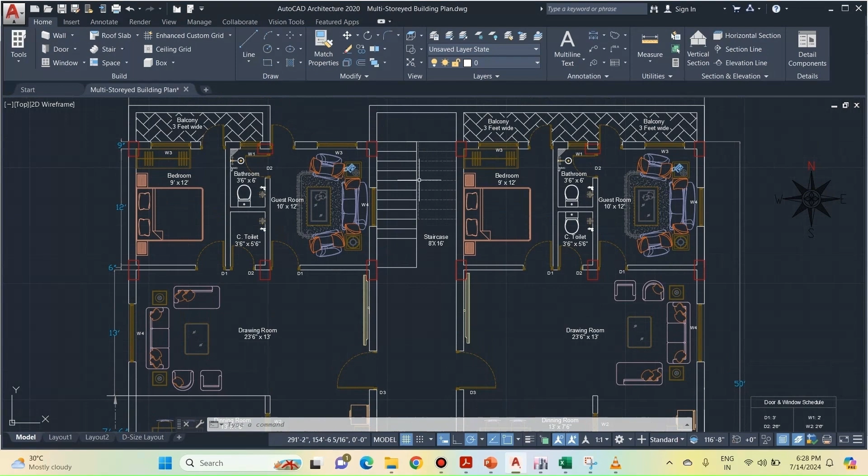In this lecture, we will be modeling a staircase in ETABS and we'll also be calculating the staircase loads and applying them in our ETABS model. So first of all, as you can see from the architectural plan, in this area we'll be modeling our staircase between these four columns. So in ETABS, if you see, in this area we are going to model our staircase. That is between grids C and D and grids 4 and 5.

First of all, in the plan view, we will be modeling the staircase connecting story 1 and story 2. So go to story 1 by clicking on this arrow, that is at elevation z equal to 1.5 meters. First of all, we need to create reference points in order to model the landing slabs.

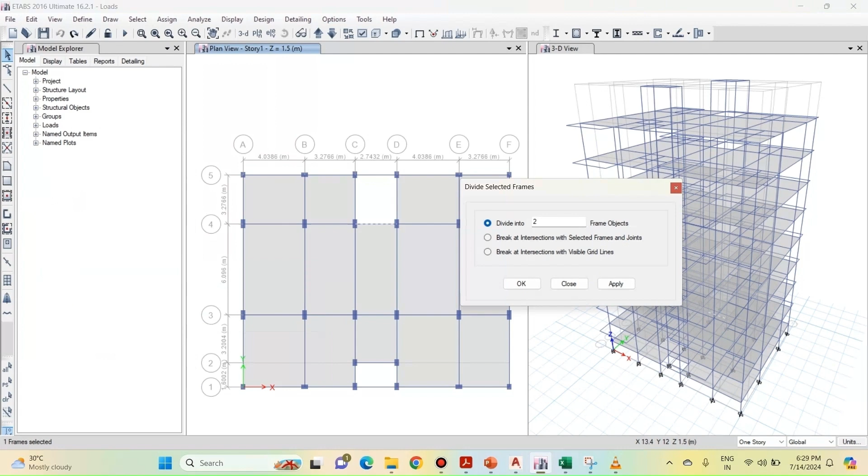In order to create the reference points, select this beam, go to the edit menu, click on edit frames and click on the divide frames option. We are going to divide this beam into two equal parts. Click on apply and click on OK. So now you can see that ETABS has divided this beam into two equal parts.

Now select these two joints, go to the edit menu, click on replicate. We are going to replicate these 2 points in the y direction by 1 meter, since the width of our landing slab is 1 meter. So type 1 here, click on apply and click on OK. So now you can see that we have our reference points so that we can model our landing slab at the level of story 1.

So we will go to this draw floor plan button in order to model our landing slab. The thickness of the slab will be 150 mm, which is similar to a typical slab. So select slab 150 from the list and click on these 4 corners of the slab in order to model our slab. So here you can see that we have modeled our landing slab at story 1.

We have divided this beam into two equal parts; however, in reality this beam will be a continuous beam. So select these two beams and let's rejoin this beam again. So go to the edit menu, click on edit frames and click on the join frames option. So now you can see that this beam is again rejoined.

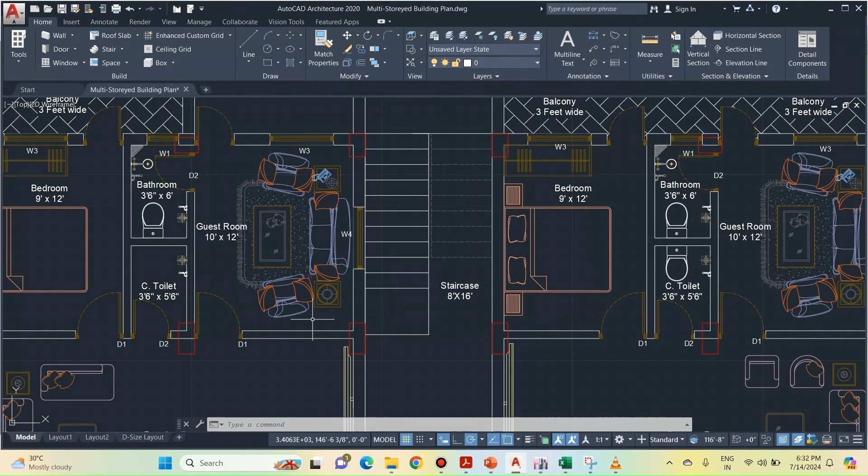Now we also need to model the mid landing slab at the mid landing level. So what will be the elevation of this mid landing slab? As you know, the floor to floor height is 2.75 meters. So the elevation of this mid landing slab will be half of this 2.75 meters.

So if you see here, from base to story 1, the height is 1.5 meters and we are starting our staircase from story 1. So we will have the mid landing slab between story 1 and 2, somewhere around this level, which will be half of 2.75 meters. So the elevation of our reference plane will be 1.5 meters plus 2.75 divided by 2, which will be 2.875 meters. So in order to create the mid landing slab, we need to add the reference plane in ETABS. So let's add the reference plane.

So go to the edit menu and click on the edit stories and grid system option. Click on modify show grid system and select reference planes. Click on add. So we are going to add the reference plane at 2.875 meters. Click on OK and again click on OK. Click on refresh view and again click on OK. So now if you see, between story 1 and 2 we have a reference plane at 2.875 meters.

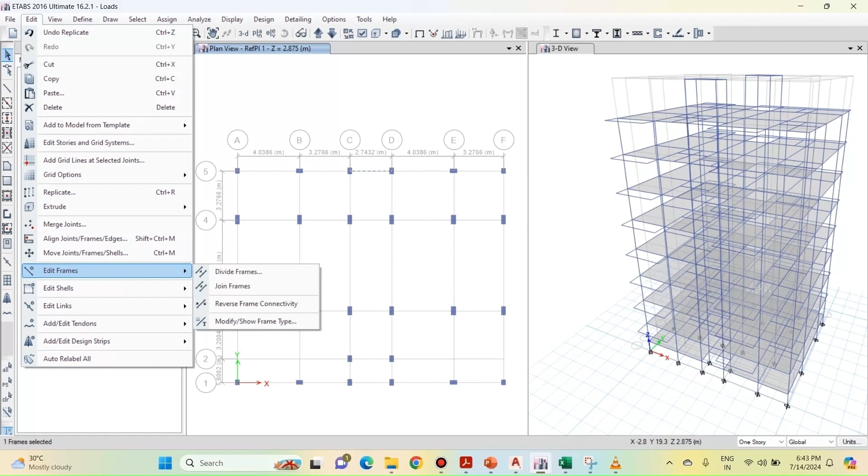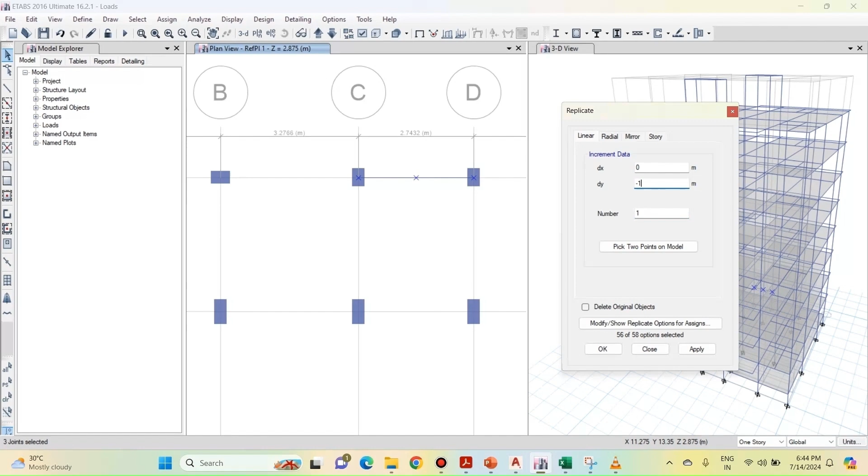Now let's divide this beam again in order to create the reference points. So select this beam, go to edit, select edit frames and click on the divide frames option, click on apply and click on OK. Now select these three joints. This time we will be replicating these three joints in the minus y direction. So type -1 here in the dy direction. Click on apply and click on OK.

Now let's draw the mid landing slab. So select the draw floor plan button. The property will be slab 150, and click on these four corners to draw the mid landing slab. Rejoin these two beams again to have a single beam.

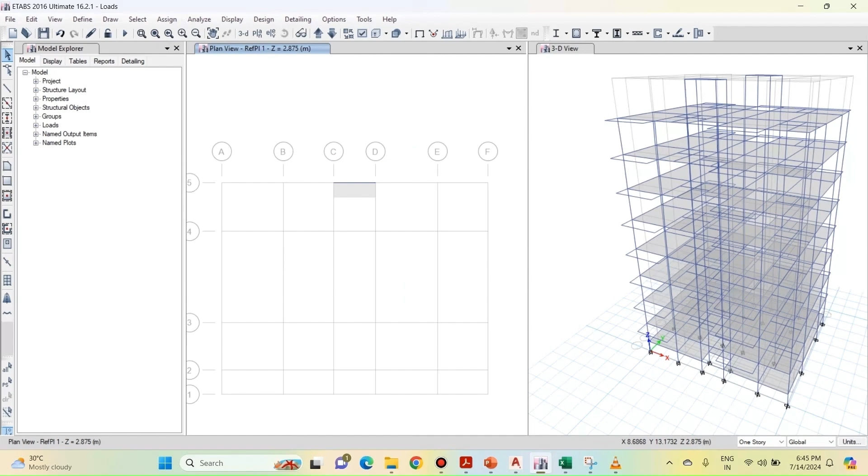Now we'll also need to create a landing slab at the level of story 2. So go to story 2. We will follow the similar procedure that we did for creating the landing slab at story 1.

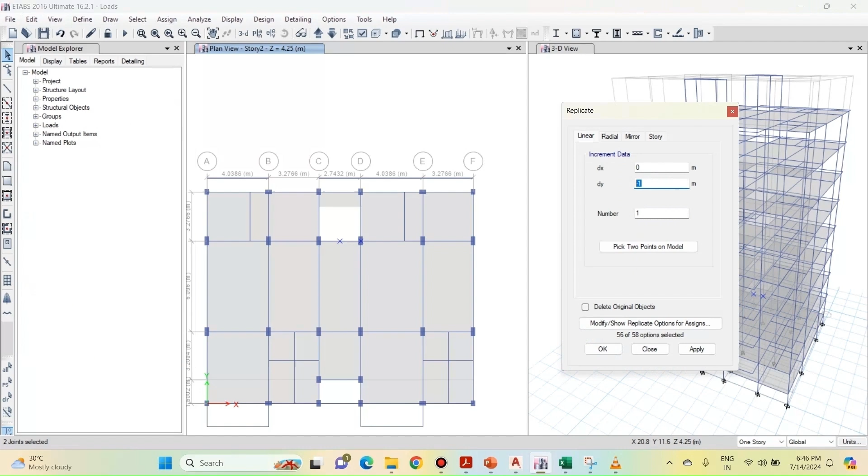Select this beam, go to edit menu, click on edit frames and divide this beam into two equal parts. Now select these 2 points, go to edit, then click on replicate and replicate these two joints at a distance of 1 meter. Click on apply and click on OK.

Now let's model the landing slab at the level of story 2. So click on draw floor plan button and click on the 4 joints to model the landing slab.

Now again rejoin this beam, since in reality this beam will be a single beam. So we have created the landing slabs and the mid landing slabs.

Now we will connect these all slabs with the help of inclined slabs. So go to story 1, click on this draw floor plan button, click on these points.

Now the other 2 points of the inclined slab will be at the mid landing level. So with this tool active, click on this up arrow to move upwards at the level of reference plane and then click on these 2 points.

The starting point will be again at the level of story 1. So again with this tool active, move downwards and click on this point to complete the inclined slab.

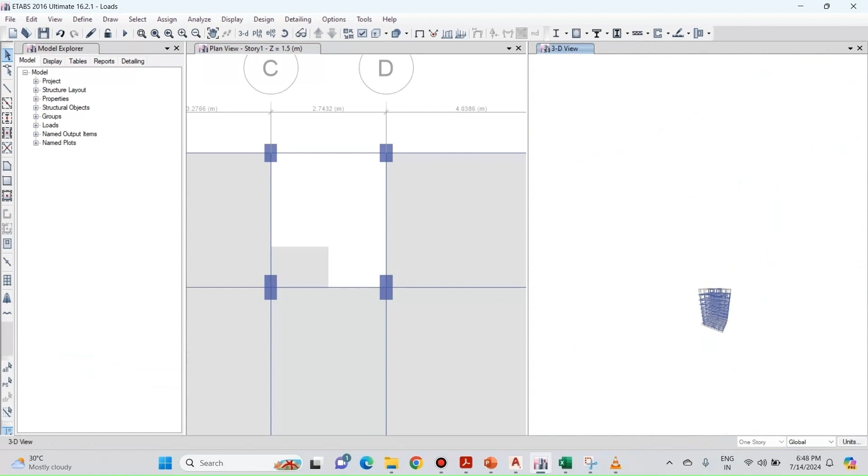Here you can see in 3D that an inclined slab is modeled.

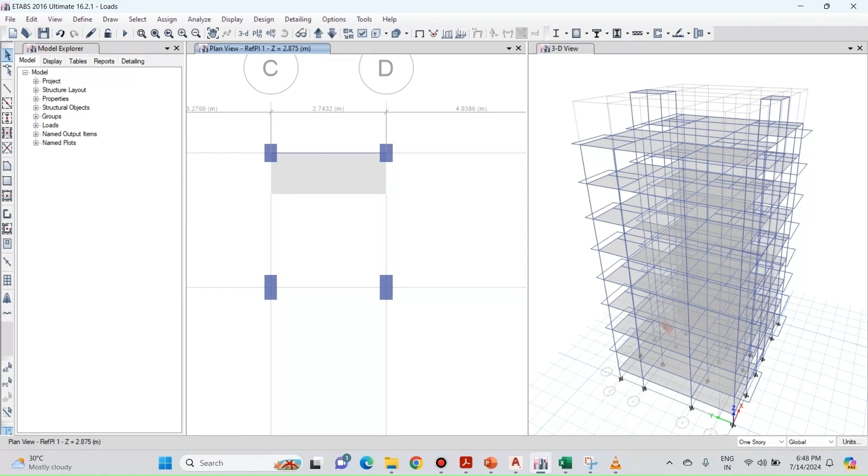We will follow a similar procedure to model the inclined slab between reference plane and story 2. So go to the reference plane level, click on draw floor plan button, click on this point, then click on this point,

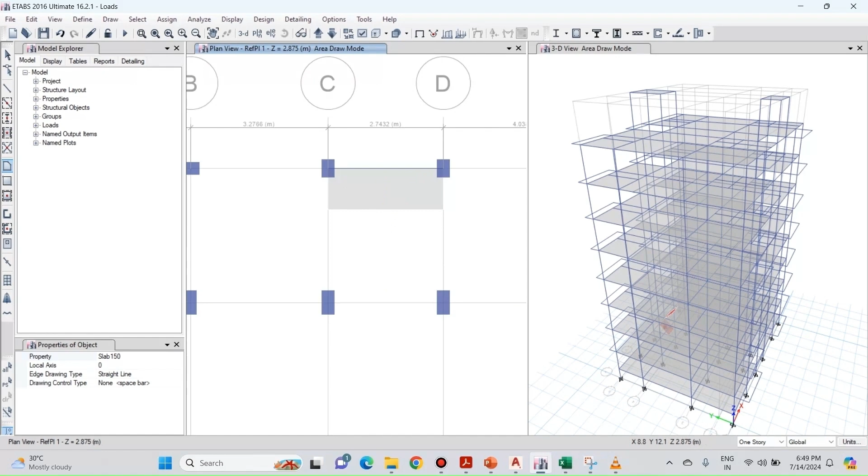then move up at the level of story 2, then click on this point, and again move downwards to complete the inclined slab. So here you can see in 3D the inclined slab has been modeled.

Now let's model the staircase between story 2 and story 3. In order to model the staircase between story 2 and 3, first of all, we need to add a reference plane between story 2 and story 3 in order to model our mid-landing slab.

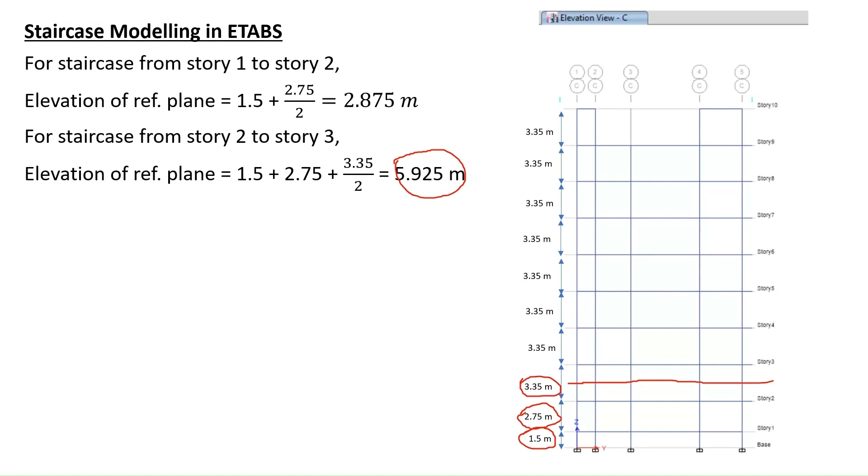And the elevation of that reference plane will be 1.5 meters plus 2.75 meters plus half of 3.35 meters. So that will be equal to 5.925 meters. So we will add a reference plane at an elevation of 5.925 meters.

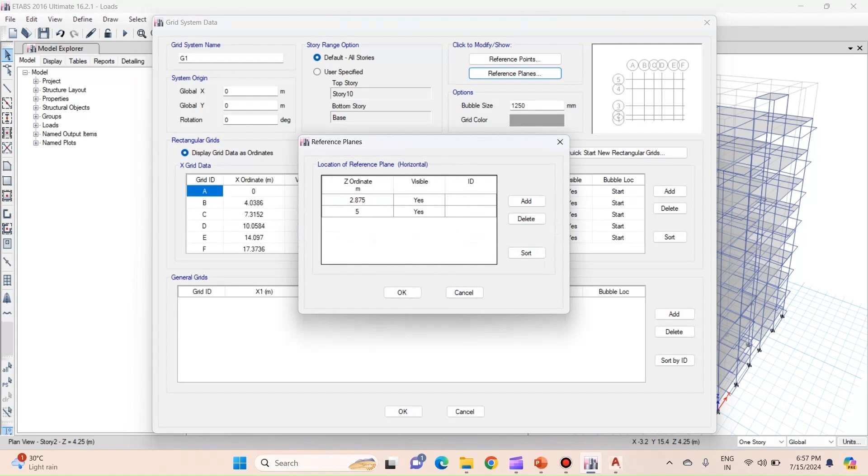So open ETABS, go to edit menu, select edit stories and grid system option, click on modify show grid system option, click on reference planes, click on add and enter the value as 5.925 meters. Click on OK, click on refresh view and again click on OK.

So now you can see that we have a reference plane between story 2 and story 3. Now again we need to have a landing slab at story 2, then we need to have a mid landing slab at reference plane 2, and then again we need to have a landing slab at story 3.

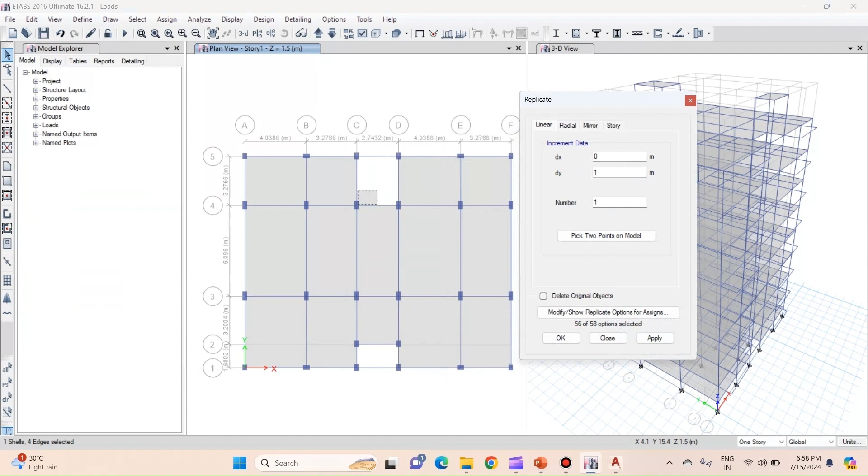So now this time what we will do is we'll replicate the landing slab from story 1 to story 2. So select this landing slab, go to edit menu, go to replicate, and in the story option we'll replicate this to story 2. Select story 2, click on apply and click on OK.

So now you can see that you have a landing slab at story 2. Now the landing slab that we created at story 2 we'll replicate it to story 3.

So select this landing slab at story 2, again go to edit menu, select replicate, and in the story option we'll replicate it to story 3. Click on apply and click on OK.

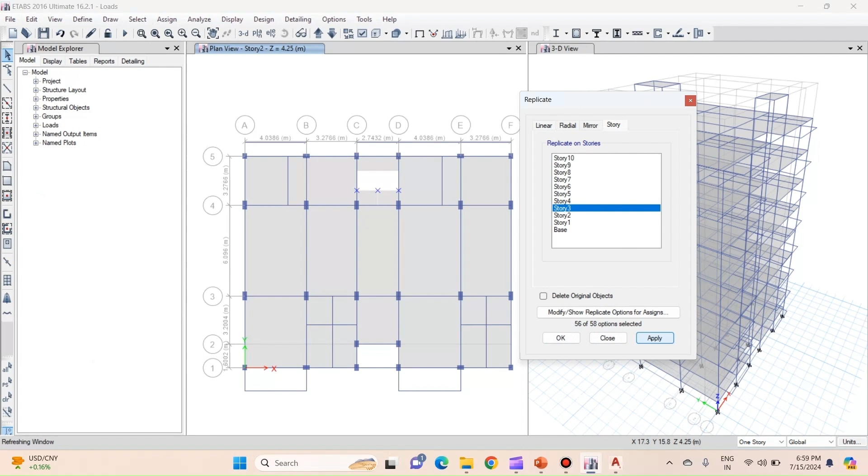Along with that, we also need to replicate these joints. So select all these 3 joints, again go to edit menu, replicate, and replicate it to story 3. We also need to replicate the 3 joints that we created at level of story 1 to story 2.

Now we'll create the mid landing slab at story 2 at reference plane 2. First we need to add a beam, so click on the draw beam option. The beam will be B2, 300 by 450. Draw a beam between grid C and D.

Then divide this beam into 2 equal parts. Copy these 3 joints and replicate them at a distance of -1 in the y direction.

Now first we need to create an inclined slab between story 2 and reference plane 2. So select this draw floor plan option. The property will be slab 150. Click on this joint, then click on this joint. Then, keeping this tool active, go to the level of reference plane 2.

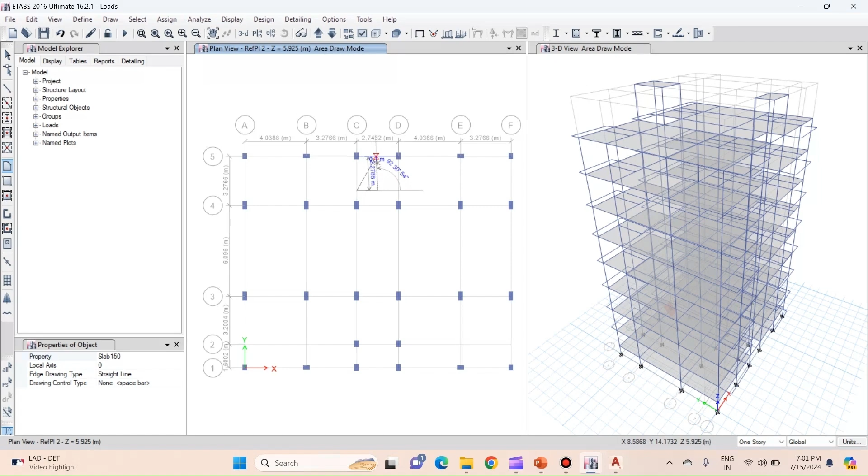Click on this joint, click on this joint, and again go downwards and click back on this starting point. So you can see that the inclined slab has been modeled.

We also need to create the mid landing slab at reference plane 2. So click on this draw floor plan option and click on the 4 corners.

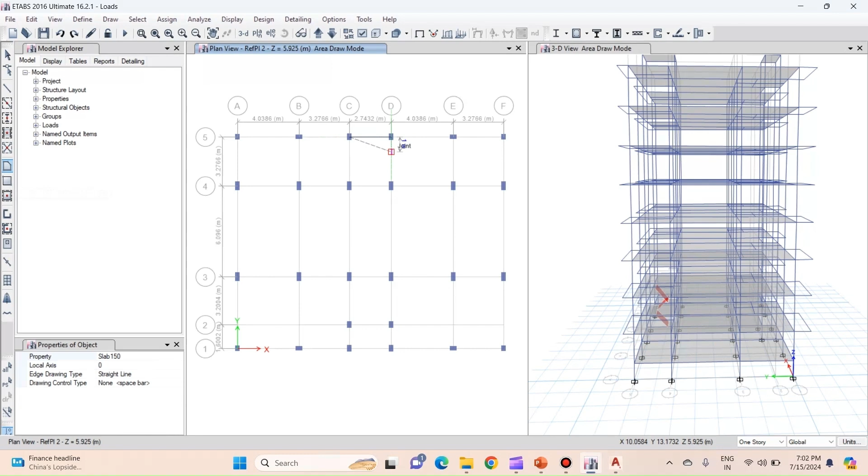Oops. So click on this draw floor plan option again and click on the four corners to draw the mid landing slab.

Now we need to also create an inclined slab connecting reference plane 2 and story 3. So go to the level of reference plane 2, and again select the draw floor plan option.

Click on this point, click on this point. Then, keeping this tool active, go upwards to the level of story 3. Click on this joint, click on this joint. Then again go downwards and click on this starting point to model our inclined slab.

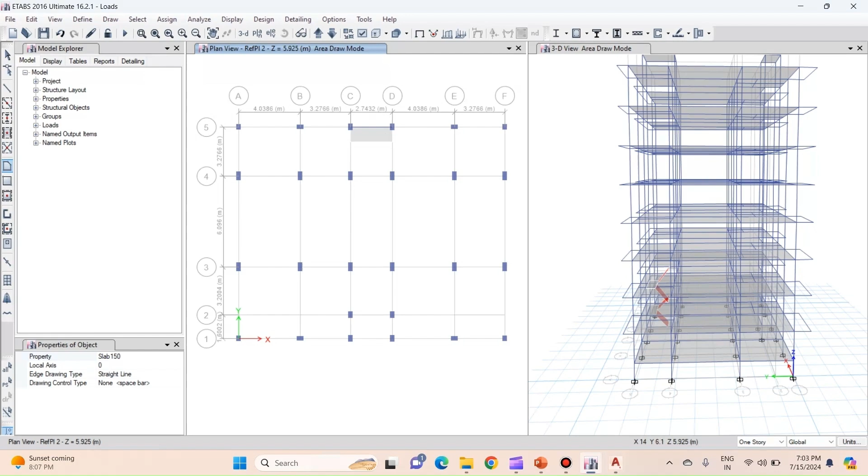So now you can see in 3D that our inclined slabs have been modeled between story 2 and story 3.

Now first we will replicate all our landing slabs and mid landing slabs from story 2 and story 3 to the upper stories. So first go to the level of story 2. This will be your landing slab, so select this slab, then go upwards.

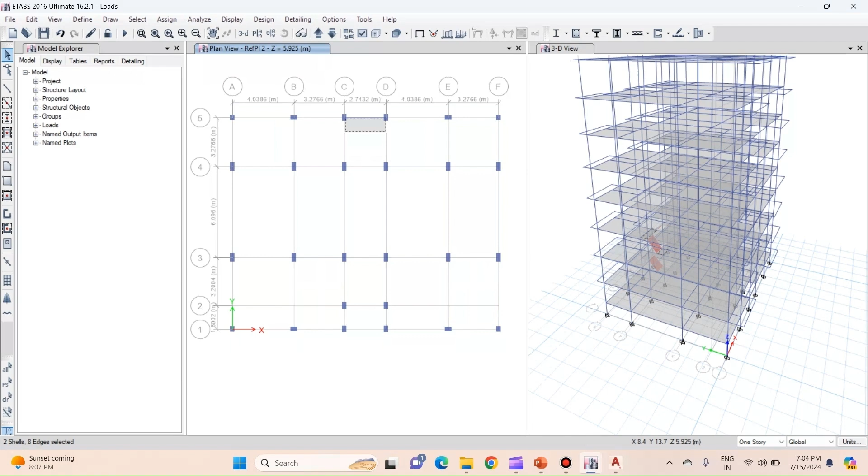Select this mid landing slab at the level of reference plane 2, and again go upwards, then select this landing slab at the level of story 3. Now go to edit menu, go to replicate, and we will replicate it from story 4 to 9. Hit apply and click OK. Now you can see that it has replicated it to the upper levels.

Now we'll also replicate these inclined slabs to upper levels. In order to do this, first we need to hide these slabs to select the inclined slabs properly. So first, activate the 3D view, go to the select menu, then go to select, and click on object type. Click on floors, click on select, and click on close.

Now in the 3D view, right click anywhere in the white screen and click on hide selected objects. This will hide all the slabs except the inclined slabs.

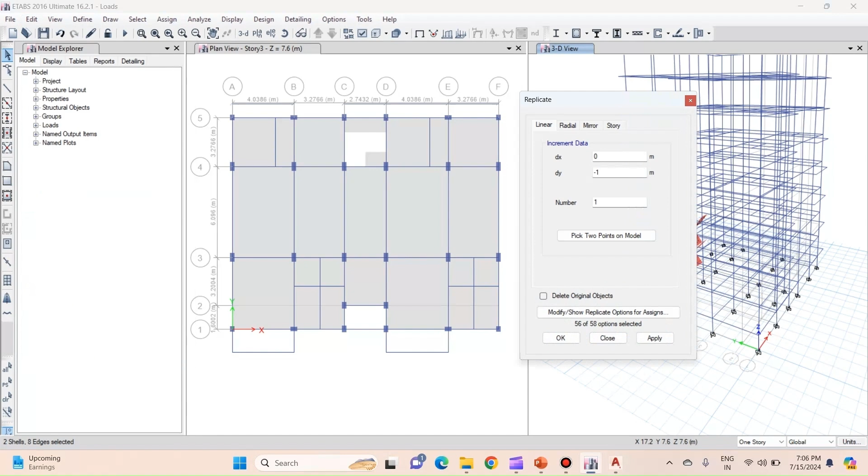Now select these inclined slabs from the 3D view. Go to edit menu, then click on replicate option, and in the story option we are replicating the inclined slabs from story 2 to 3 to all the above stories, so that will be from story 4 to story 9. Click on apply and click on OK.

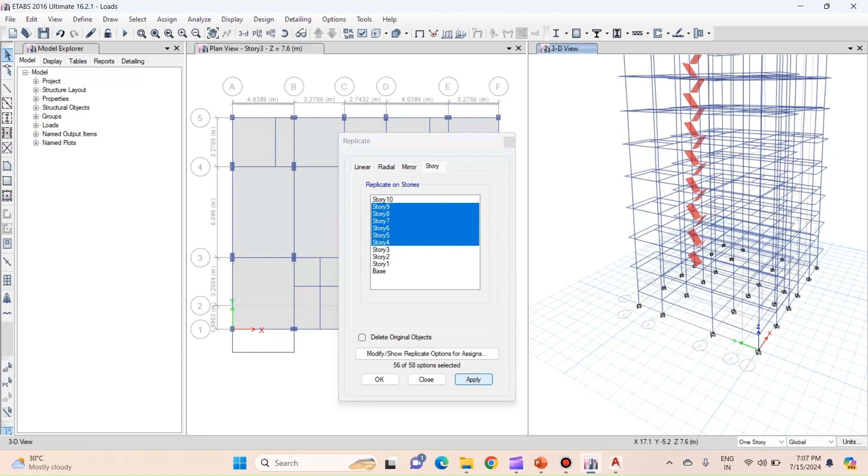So here you can see that all the inclined slabs have been replicated. Now again right click anywhere in the white screen and click on show all objects. So this is how we'll model our staircase in our G+7 floors residential building.

Now I will show you how to calculate the staircase loads and apply them in our ETABS model. The first load we need to add on our staircase will be the dead load on landing slabs, which includes mortar plus clay tiles plus ceiling plaster. So you can add a value of 0.52 kN per meter square on the landing slabs.

The next load we need to add will be the live load on staircase. As per IS 875 part 2, the live load on staircase will be 3 kN per meter square. The third load we are going to add will be the dead load of the steps on the inclined slab, which as per calculation came out to be 2.5 kilonewton per meter square.

So I have prepared an Excel spreadsheet, and I will show that spreadsheet and explain how this calculation of the steps is done.

So as you know, the steps will be resting on this inclined slab. So this is our step, and the step will have a tread and a riser. This step will be imparting the superimposed dead load on the inclined slab, and we need to also add this dead load of these steps.

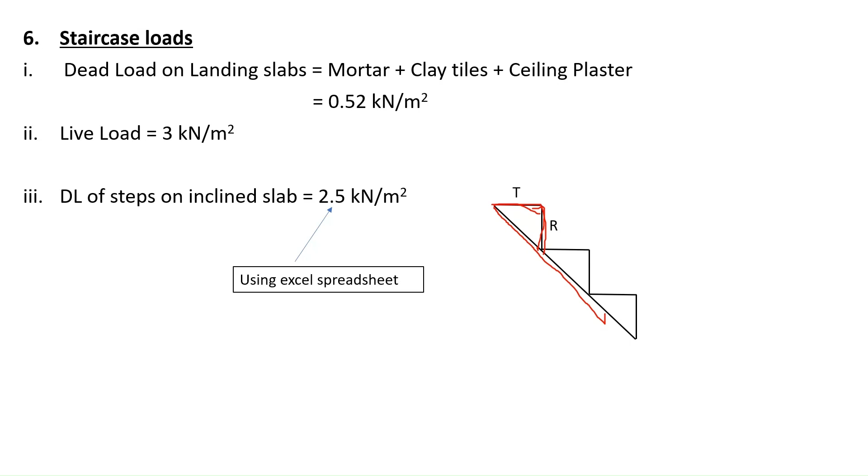Let me show you how to calculate these dead loads. First of all, I have taken the value of tread as 300 mm and the value of riser as 180 mm, which is equal to around 7 inches. And the floor to floor height in our building is 3350 mm.

Now first of all, we will calculate the total number of steps required up to the mid landing level, that is, the total number of steps in one flight. So to calculate the total number of steps, we need the height up to the mid landing level. That will be half of this 3350, and we know the value of riser of each step, that is equal to 180 mm.

So if I divide half of 3350 by 180 mm, I will get the total number of steps. So what I have done here, first of all, I have taken half of 3350 and I am dividing it by the value of height of one riser, which is 180 mm. So I will get the total number of steps required. That is 10 steps.

Now I will calculate the area of step. We know that area of triangle is equal to half into base into height. This step is in the shape of a triangle. So to calculate the area of this step, it will be equal to half into base, which is nothing but the value of tread, and into height, which is nothing but the value of riser. So this will give me the area of step.

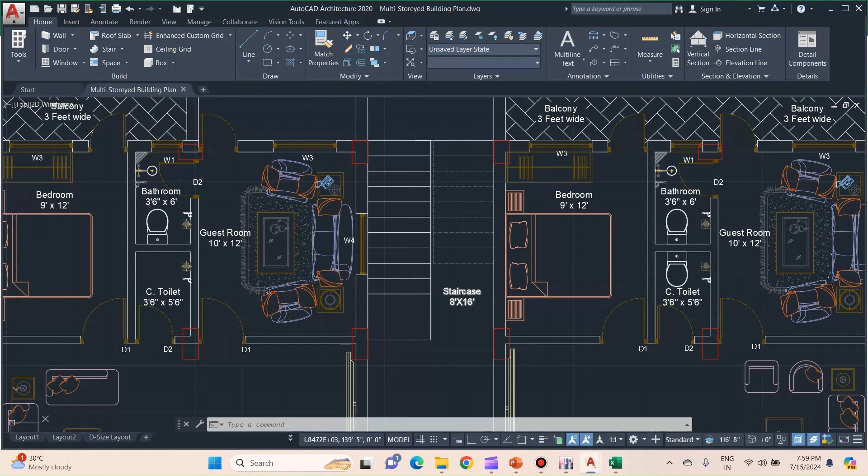Now what is the length of step? As per our architectural plan, the length of step will be this much. We know that the staircase area is 8 feet by 16 feet, so the length of step will be almost half of this 8 feet. You can calculate exactly the length of step from this AutoCAD file. In our case, the length of step is 1.38 meters. So multiplying the length by area, we will get the volume of each step.

And we know that unit weight of brick is 19 kilonewton per meter cube. So I will multiply unit weight by volume, and I will get the weight of each step. Total weight of all the 10 steps will be equal to weight of one step multiplied by 10. So this will give us 7.07 kilonewton.

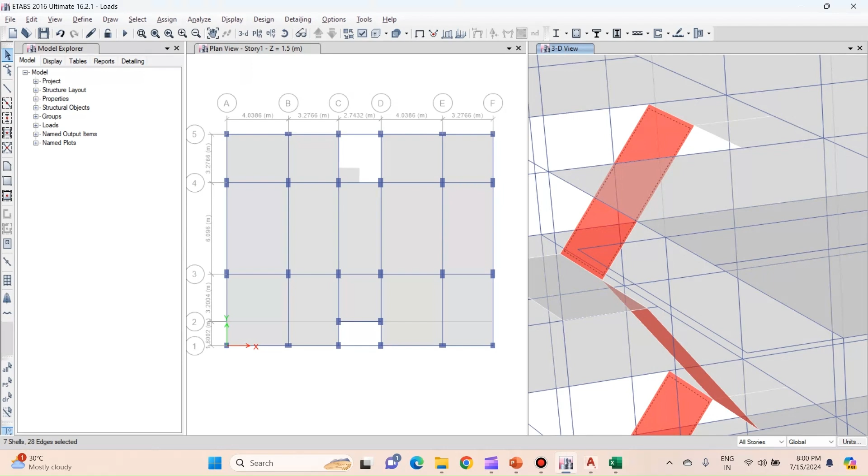Now I will find the area of inclined slab from ETABS. Now I will switch back to ETABS. If you select any inclined slab and right click on that, then you will get the area of that inclined slab. So that is 2.89 in our case. So we'll enter the value here as 2.89.

Now I want the area load. So what I will do, I have total weight of all the steps, I will divide it by the area of that inclined step. So I will get the load on the inclined step, which is nothing but 7.07 divided by 2.89. So I will get the load on inclined step as 2.5 kilonewton per meter square.

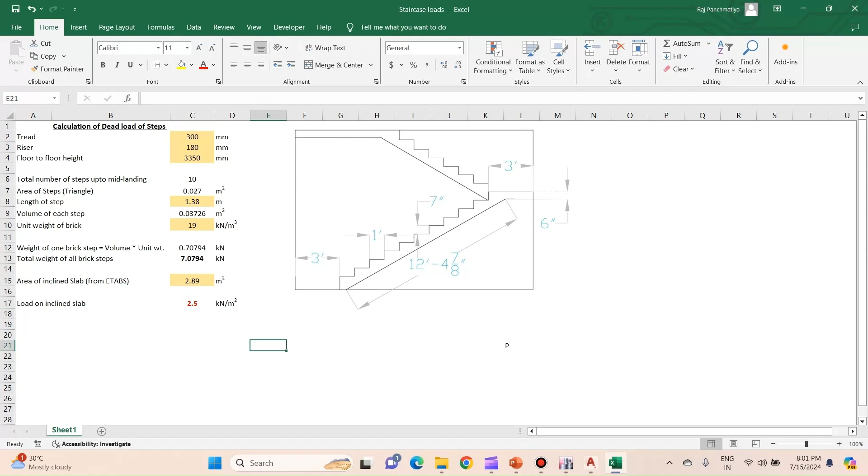So now I have all the values. I will apply all these load values in ETABS. First of all, I will apply a value of 0.52 to all the landing slabs. So from the plan, first of all, make sure that here the all story option is selected.

Then select all these landing slabs. Go upwards, select mid landing slab as well. Again go upwards, select this, and go to the topmost floor and check that all the landing as well as mid landing slabs are selected.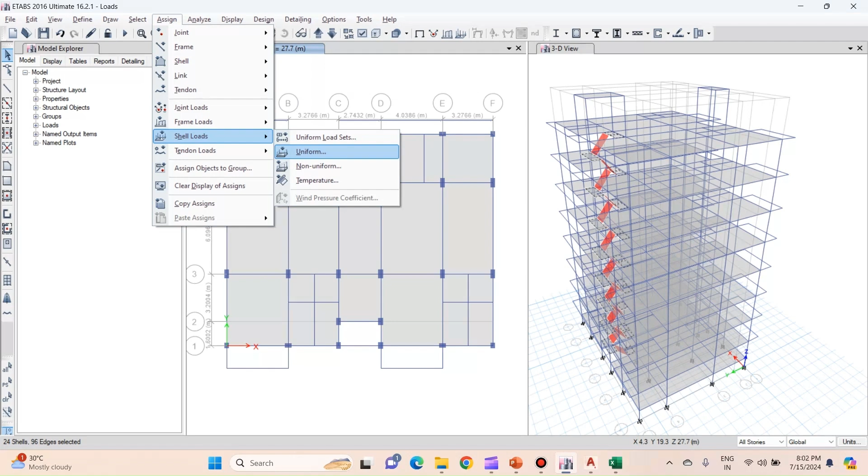Now I will go to assign, I will go to shell loads, then I will click on uniform. So we are applying dead load of 0.52 kN per meter square, and the direction will be gravity.

Click on apply and click on OK. The next load that we are going to add will be the live load on staircase. So live load on staircase, we will add it in both the inclined slabs as well as the landing slabs. So first of all, let's add the live load in the landing slabs.

So go to select option and click on get previous selection. So all the landing slabs have been selected, which we had selected previously. Now again go to assign, go to shell loads, go to uniform. This time we will select the load pattern as live. The load value is 3 kN per meter square. The direction will be gravity. Click on apply and click on OK.

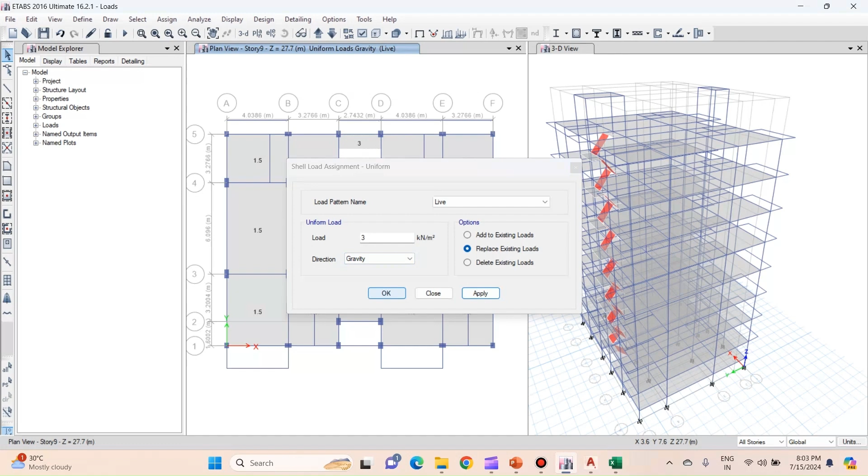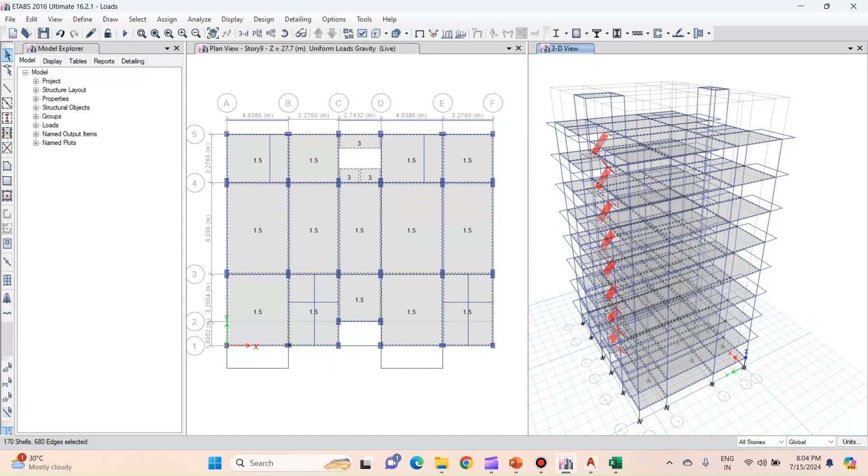The same value of 3 we need to also assign it to the inclined slabs as well. So in the 3D view, first of all, we need to hide all the slabs. So go to select, in the object type, click on floors, click on select, then click on close, then right click anywhere in the 3D view and click on hide selected objects. Now you can select all the inclined slabs by left clicking on it.

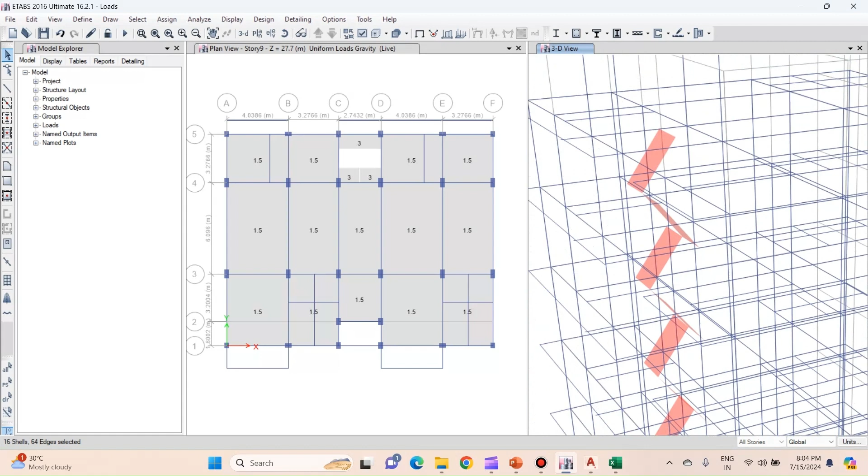And again we'll go to assign, we'll go to shell loads, then click on uniform, and we'll apply a value of 3 in the live load. Click on apply and click on OK.

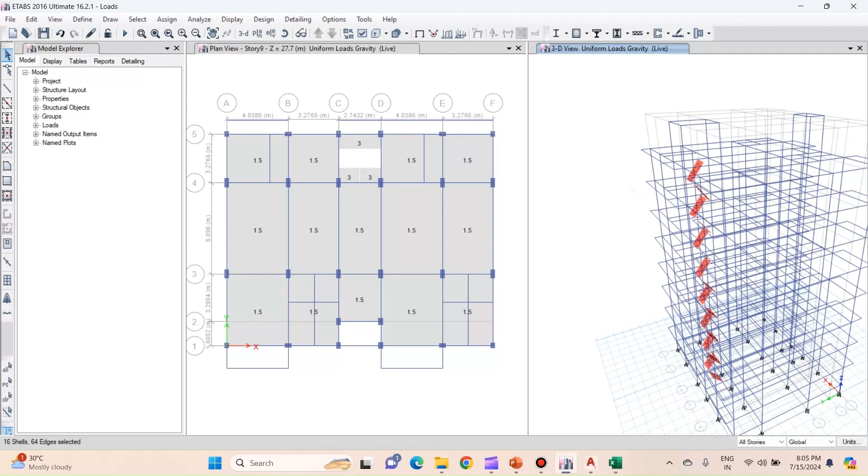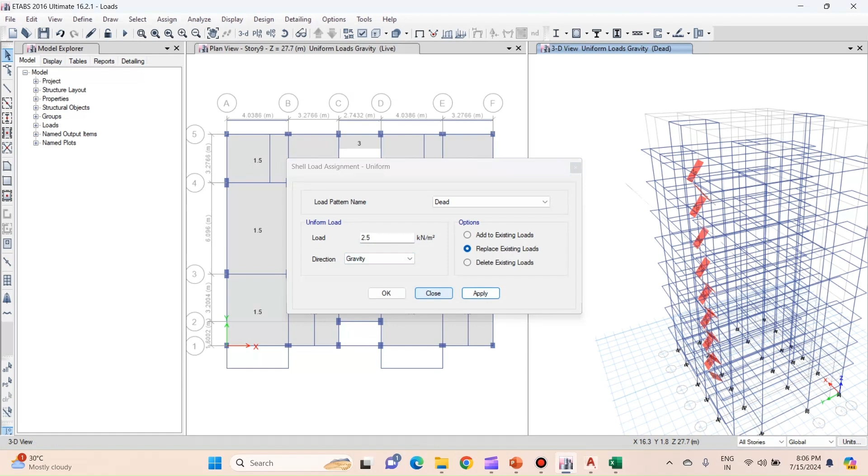The next load that we'll be adding will be the load of the steps. So go to select and click on get previous selection. So again all the inclined steps have been selected. So we'll go to assign, we'll go to shell loads, we'll click on uniform. The load pattern will be dead since it is the dead load of steps, and the value is 2.5 kN per meter square. The direction will be gravity. Click on apply and click on OK.

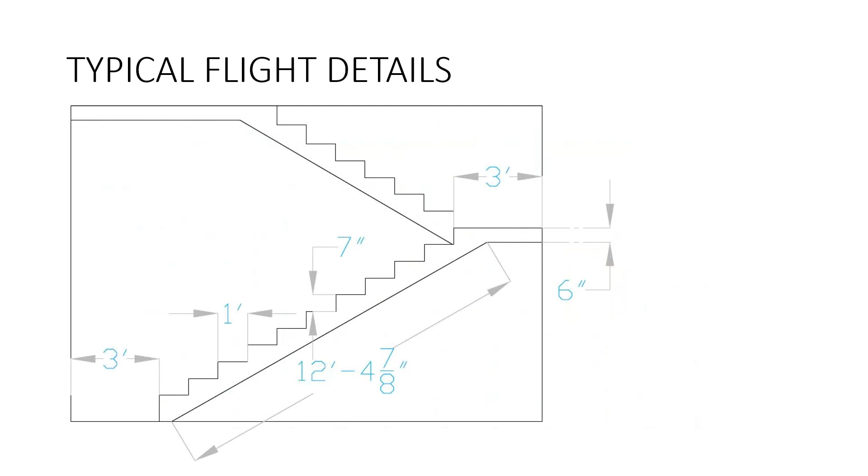Now let's design the staircase. In order to design this staircase, we are going to use the standard design table that is given by Super Civil CD software. So first of all, based on the architectural plan, we know that length of our landing slab is 3 feet. Then length of our inclined slab is approximately 12 feet 5 inches, and length of our mid landing slab is 3 feet.

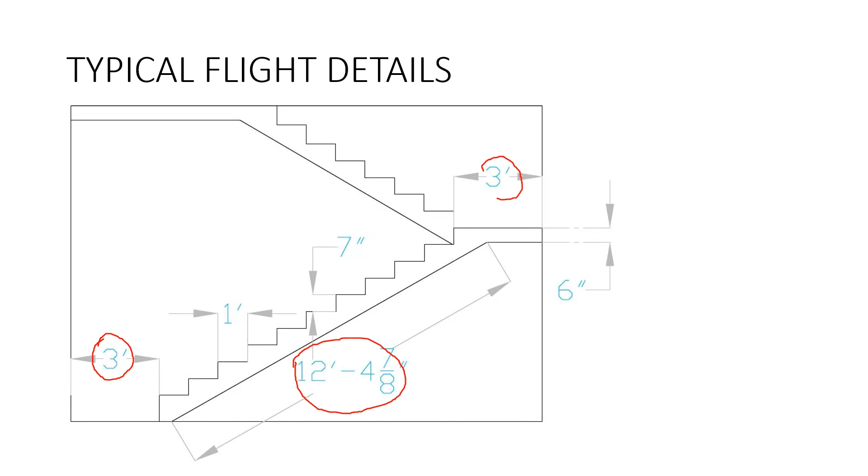So the total span, that is nothing but length of each flight, is equal to 3 feet, the length of landing slab, plus 12 feet 6 inches, the length of inclined slab, and again 3 feet, the length of mid landing slab. So total span is 18 feet 6 inches, which is approximately 5.6 meters.

So if you look into this design table, for a span of 5.6 meters, we can provide 16 mm dia at 140 mm center to center main steel and 8 mm dia at 200 mm center to center distribution steel. And the permissible cantilever allowed for this span will be 1.35 meters. In our case, the cantilever provided is 1 meter, which is nothing but the length of the mid landing slab. Since this cantilever length is less than 1.35 meters, it is okay.

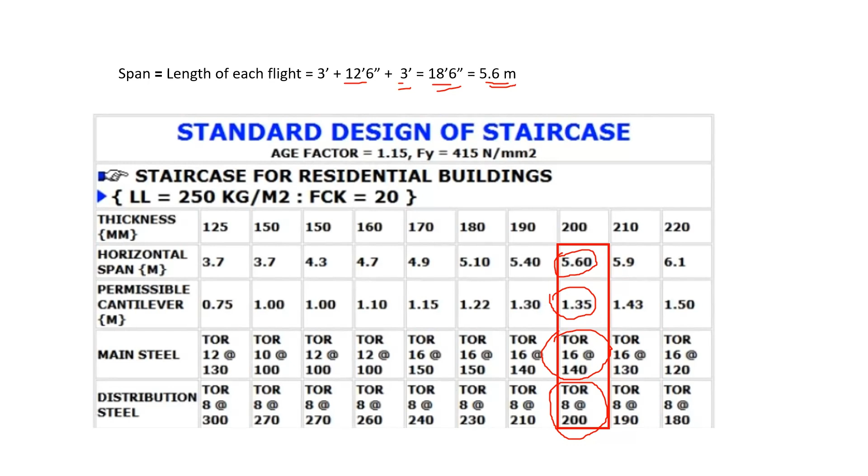Now you might be wondering why we are modeling this staircase in ETABS, since we are directly giving the reinforcement values from this table. The reason is that after modeling the staircase and applying the loads on it, the 4 columns on which the staircase is supported will be experiencing maximum bending moment and shear force. And if we do not model the staircase, then those 4 columns will be under designed. So this is the reason why we are modeling the staircase in ETABS.